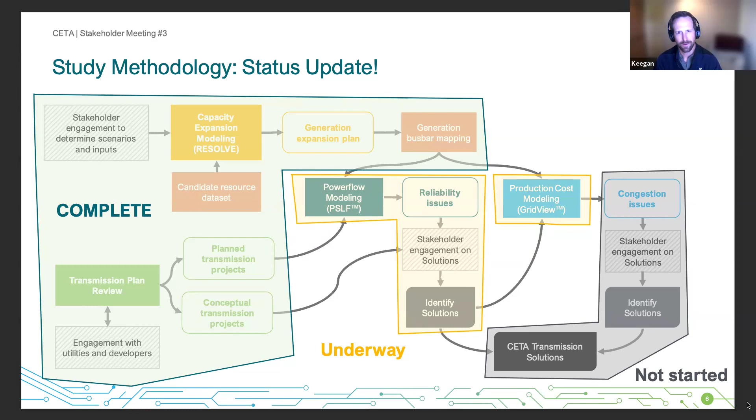I created a version of this. This really shows where we're at with the study. Everything in green on the left-hand side, we're done with — we've completed those tasks and have information building up to the analysis that's ongoing now. The work underway is primarily the reliability analysis and the development of the production cost model. The work yet to be done is the congestion assessment and the synthesis of all this to finalize a set of transmission solutions in a transmission portfolio. So this gives you a good view of progress made to date and work that remains.

Thanks, Keegan. Deb, if you could keep going, please. Thank you. So the timeline and stakeholder engagement.

Leading up to that, as our commitment to stakeholder engagement, we've been providing a 4-meeting series. We're in stakeholder meeting number 3 today, where we'll review the reference case reliability results and talk through some potential solutions. We held 2 meetings prior to introduce the study and talk through scenarios, plus additional stakeholder outreach by email — that was the bus bar mapping proposal and feedback there. So a third opportunity where we heard from you all, and we really appreciate that. There's a fourth stakeholder meeting coming in July — we have yet to set the date. I'll communicate that by email and via the website.

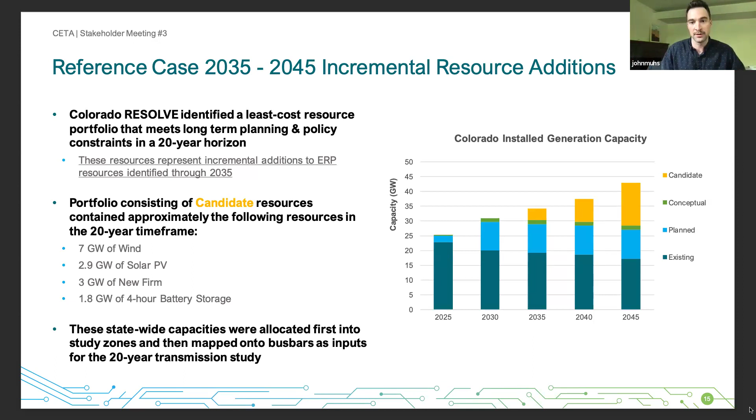As I mentioned, we allocate that resource capacity into one of 9 study zones. And we took a slightly different approach for wind and solar than we did for the new firm and the battery resources. I'll just say from a high level, adding significant amounts of resources onto a grid that has present day limited hosting capacity can be more of an art than a science.

But we tried to make it as informed as possible in terms of the first step we took here, which is really our attempt at what do we know about the grid and its hosting capacity in the near term. Again, that's based on our 10-year representation. So looking forward from the 10-year, is there any areas where we can include wind or solar resources in the system that are going to have minimal impact to transmission upgrades? So that was really our first step.

And then secondly, beyond that, we had to fall back on other considerations: development potential, resource quality, and a qualitative review of commercial interest. As I mentioned, we're not certain of exactly how things are going to come to fruition or how this portfolio would come to fruition. So we are testing some low and high resource levels where we're adjusting these wind and solar resources by plus and minus 30%.

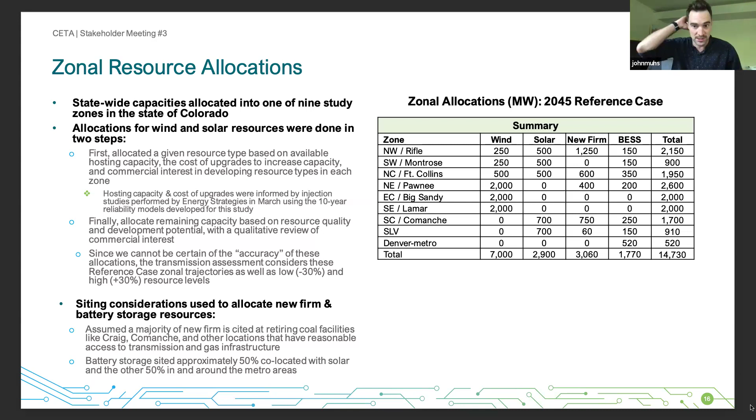The table on the right shows the resource allocations into our 9 zones. And then if you go to the next slide, it's the same material, but shown on a map. This map shows how resources got allocated to different zones in the model.

You'll notice that we made a Denver metro zone that we specifically added battery storage to. This was based on stakeholder feedback, and I think it makes a lot more sense. Previously, we didn't have metro as its own zone, so we had battery storage spread out across zones that were meant to represent the metro area. Next slide, please.

So once we had those zonal allocations, the next step was to map things to bus bars within those zones. Tom will be covering a good portion of this, but the way that went down is we worked with a subcontractor, Emily Leslie at Montara Mountain Energy, and she did an analysis where she helped us rank order bus bars based on a number of different criteria, including commercial interest, voltage, and other criteria.

For each of our 9 zones in the model, we rank ordered the buses based on those criteria, and then had an iterative process where we would allocate up to a certain amount of capacity at each of those buses. That was a preliminary, first-pass, automated process. Then we passed that along to Tom and others, and per stakeholder feedback, Tom made a number of changes based on his experience and stakeholder feedback. So that was all part of the process. We wanted a human in the loop for that decision-making process.

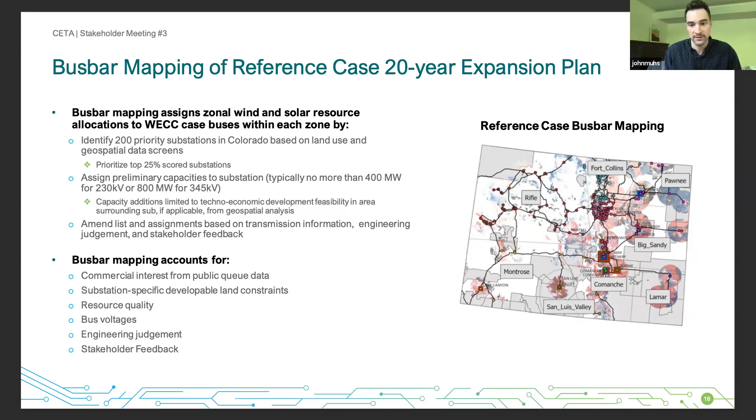With that, I'll move on to the next slide and the study sensitivities, and then we should have time to take a couple questions on this. So we're going back now and starting the process over again, looking at developing capacity expansion portfolios for 2 additional sensitivities. From my understanding, these sensitivities were developed based on stakeholder feedback and other discussions. The 2 I'll be discussing are categorized as the planning scenarios: regional integration, representing Colorado's integration with a broader SPP market, and a high demand future that I'll talk about as well. So let's go ahead and get into the first one.

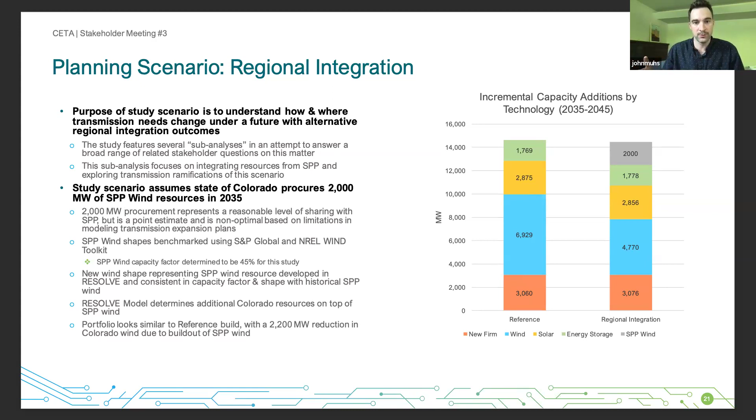So that's the regional integration. Let's move on to the high demand scenario. The purpose of this scenario is to understand how and where transmission needs change under a future with high load growth and electrification.

We did benchmarking of loads with the NREL Electrification Futures scenario. Our reference case was based on the medium moderate electrification future, and this high demand case was based on the high moderate electrification future, representing basically a deep electrification future for load.

Notably, the Resolve model we procured for this study was used in 2021 for a greenhouse gas roadmap study. The high demand modeled in this scenario was similar in scale to the highest load scenario - I forget exactly what it's called, House Bill 1261 or something like that - similar in magnitude to that scenario. There's some documentation that might be helpful if you want to understand what assumptions go into load growth of this nature.

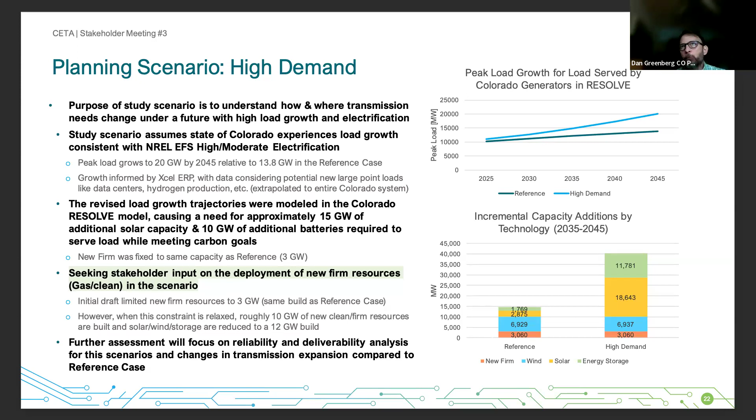In terms of, I guess what I'm asking about, just to clarify, it sounds like you're talking about different components of the load and how that affects their contribution toward peak. My question is more about the ability to have demand responsiveness that can reduce the peak at specific times. Yep, I'm pretty sure that there was some of that represented in the model, I'd have to go back and double check. If so, I don't know exactly how much there was, so I could get back to you on that if you would like.

But I just want to suggest that would be very interesting, I certainly would be interested, and I think probably a lot of parties would be interested in looking at a scenario where you have a pretty significant penetration, or pretty significant ability to shift load. Let's say a lot of the demand that's added is data centers. Data centers can shift their load all over the country very quickly, it's my understanding, depending on what's going on with the grid. So that's a potential there too, in addition to vehicles and, probably to a much lesser degree, heat pump loads.

Thanks, Dan. That sounds like one that we'll maybe take back and get some answers for you. We'll follow up. And I'm going to move on to Ken then, and we'll take Ken as our last question and then move on to the next part of the presentation.

So I noted in your regional integration scenario that you were showing about 2 gigawatts of import from SPP of wind. It occurs to me that if we have the capability of importing and exporting 2 gigawatts, we would probably be exporting like 2 gigawatts of solar into SPP. Have you thought about including that in the model, because it might also help to economize solar in the state as well? Anyway, thank you.

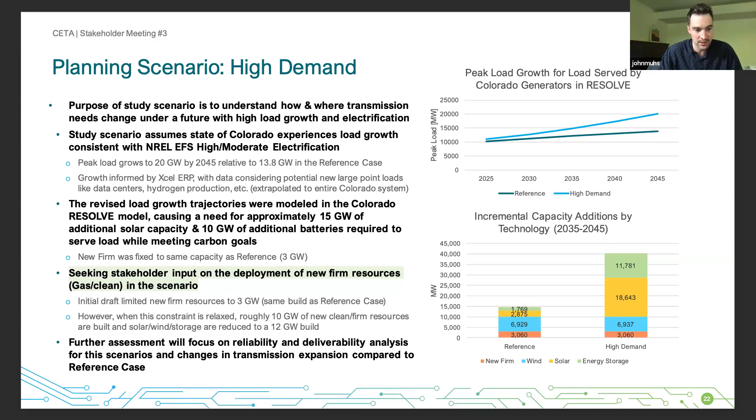Thanks. Yeah, so that's definitely, I will just say that concept is not represented in this capacity expansion modeling. And I would probably defer to Keegan or Tom as to what future subsequent studies will be doing as part of this, or analyses will be doing as part of this, and if they are capable of accounting for that. So I don't know, I'm not the right person to answer that.

So Ken, I think the thing to think about there is, really it's how many games of three-dimensional chess do we want to play at the same time? So your point is probably true, Colorado could become a solar exporter. To what extent does that impact the transmission system is kind of all that I really care about in the context of this study. So I maybe encourage you to think through that a little bit and send us some comments. If there is a discrete impact that you would say is relevant to the study, we can definitely take that into account. But if it gets exported and it's developed close to where it's exported from, the impact on the Colorado transmission system is maybe intuitively null or very little. So just think through that. I think it's interesting from a market perspective, meaning just additional development activity, but again, just trying to recenter us: what's the transmission impact on Colorado?

Thank you. Thanks, Ken. Okay, if we want to move on to the next slide, please, Deb. And we're on to the 20-year reliability assessments.

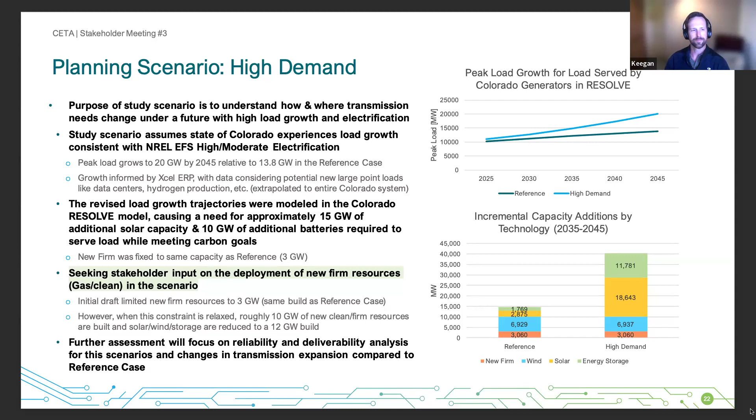So, all right. Thanks, Cathy. And I think we're on to Tom. All right, just want to make sure you can hear me. Sounds good, yep, thank you. All right, well thanks. Good morning.

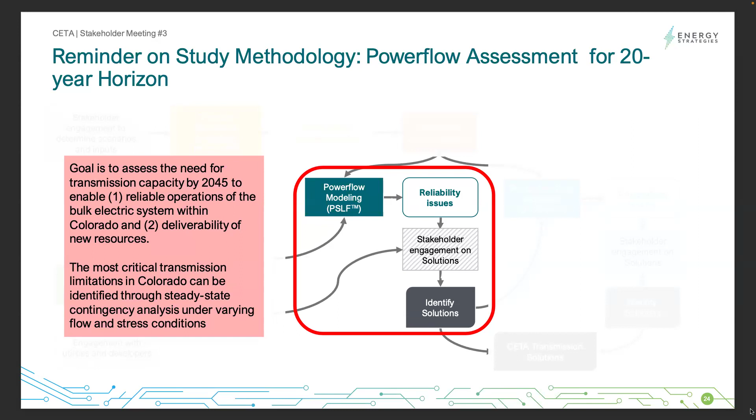Now we're going to get into what I think is the best part of the presentation. This is really exciting. So this slide here really kind of zooms in on the flow process that Keegan showed earlier, really a simplified version of what we're doing with the reliability modeling. And we talked about this in the previous stakeholder meeting about all the things we did for the 10-year, and we're going beyond that to the 20-year. But the process is very similar in that we do our reliability assessment, we try to uncover issues associated with those assessments, make some preliminary recommendations, and then again, we'll be asking for feedback from all of you in regards to what our results are.

So just to set the stage a little bit, our goal here is to understand the transmission capacity needed. And we've indicated this before. Even though later in the presentation you'll see an actual portfolio that we've developed based on the results, the idea behind this is to try to understand the magnitude of transmission development that might be needed, and these are based on the assumptions that we used. So again, I'll talk a little bit more about the assumptions that went into this analysis. John really set the stage for the resource assumptions and where we located those. And of course every study is dependent on the assumptions, but the resource assumptions John really laid out, as to where we located those resources, the magnitude of those resources, that really helped develop the basis for the studies going into this.

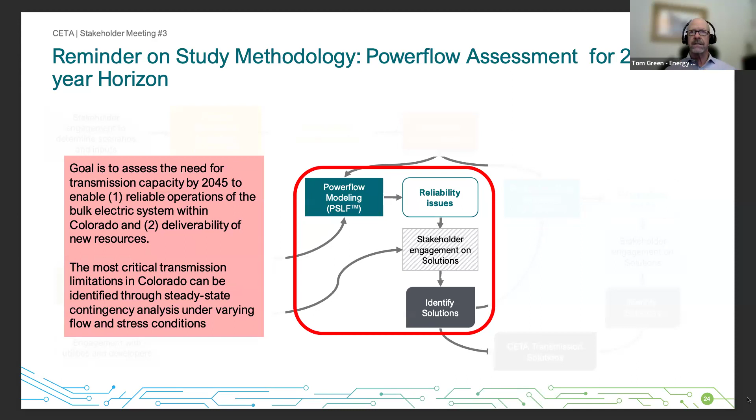So if you move on to the next slide, just to talk a little bit more about the methodology. We did talk about this when we did the methodology for the 10-year assessment.

This is a very similar slide to what we showed for the 10-year assessment. But in this case, we're doing things in a different process. During that discussion about the methodology for the 10-year assessment, we looked at it in terms of reliability versus deliverability.

As a planner, everything we look at is in terms of reliability. But back then, we took a 10-year model and added additional generation, made some assumptions, and did a statewide assessment of that 10-year case. Then we moved on to the deliverability aspect, where we broke down zone by zone within the state, trying to stress the transmission system for each zone to understand where the weaknesses are and where transmission might be needed. We did that with the 10-year.

For the 20-year, we're taking a different approach, starting with the deliverability side. We're doing the zone by zone approach, trying to determine what the transmission issues are, where we see the needs, and developing a transmission portfolio or overlay based on that zonal analysis. Then we'll take all that information, put it into a single model, and do the overall statewide reliability assessment. So a little bit different for the 20-year analysis.

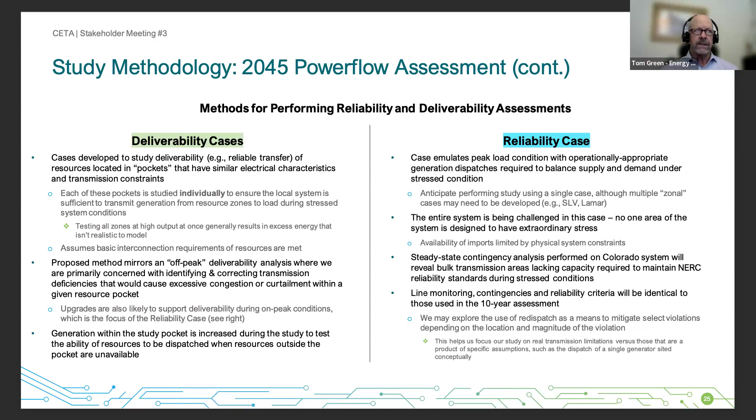If you go on to the next slide, I'll get into more detail about the methodology. For any of our studies, there are some essential components that go into the assumptions we make before we initiate the studies. That has to do with what load we're going to model, what generation we're going to model, and what transmission we're going to put in, at least for the benchmark models before we start the evaluation.

As far as the load goes, John touched on this a little bit, but between the 10-year time frame and a 20-year time frame, the load is going to grow. We have to make some assumptions around what that load growth will be. We got this information from a variety of sources, but starting with the 10-year case, we assumed a compound annual growth rate of around 1.9%.

What that really means is around 2%, you can look at a lot of different load growth factors. We did look at the different utilities' resource plans and what they're thinking about, and that's where we landed. Practically, that means about 20% more load in the 20-year case than what we had in the 10-year case. In terms of megawatts, that's like a 3,000 megawatt increase in Colorado load on its own, so a 3 gigawatt load increase.

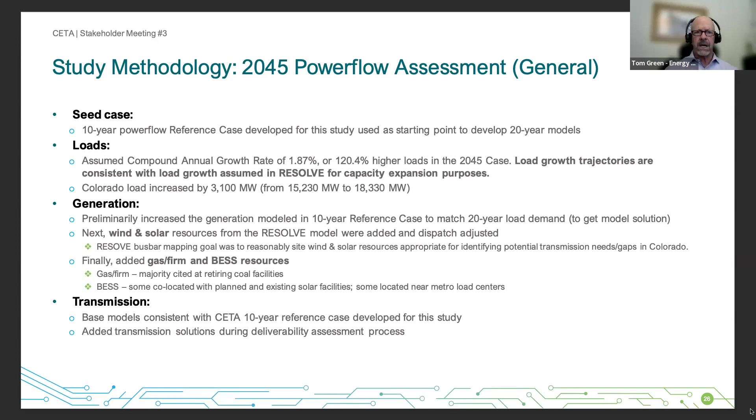The next slide is just some additional methodology in terms of how we performed our assessment. John mentioned the zones. Thinking back to the second stakeholder meeting when we did our 10-year analysis, we broke the state of Colorado into 4 zones. Based on the bus bar mapping, we expanded that even further, and now with this 20-year analysis we have 9 zones where we're looking at stressing the system from each of those zones. As far as our methodology, similar to the 10-year, we evaluated each zone independently.

What we did is we dispatched the resources in each of those zones, both the existing and the new generation, to maximum or near maximum levels, and then scheduled that out of the zone to other zones within the state, or if necessary, outside the state. That's just a common practice planners use to stress the system in each area to identify weaknesses and uncover hot spots that may need to be addressed.

This is very similar to what a lot of utilities do. If you're familiar with large generator interconnection studies, there's a cluster process where entities break their systems down into smaller pockets or clusters and do a similar type of analysis. So it's a common method of doing the analysis.

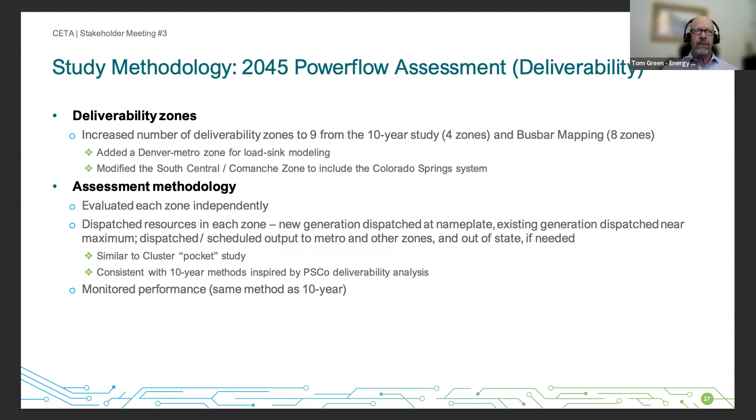If you go on to the next slide, I see another error in here, in that our total is closer to the 15 gigawatt level versus the 13.8 that's shown here. But what's described here are the zones that we used.

John mentioned we established a Denver metro zone in part to put some battery storage there, but it was also to help us on the planning aspect. That Denver metro zone was not meant to try to understand all the transmission limitations inside Denver metro, because as we've stated before, our goal is not to understand all those issues, but to understand what kind of transmission may be necessary to deliver power to that metro zone. So we used that on the planning side more as a sink. As we raise up the generation in each of these zones outside the metro, we'll schedule that to the metro area and also to areas beyond to help us with our study.

We did adjust our southern Colorado zone a little bit to incorporate the whole Front Range corridor leading up to the metro. So that now encompasses not just the Pueblo area, but really the Colorado Springs area as well. In some of the previous pictures you've seen, that Colorado Springs area was included more in some of those eastern zones, and it just made more sense to us to include it in that south central zone as we did our analysis.

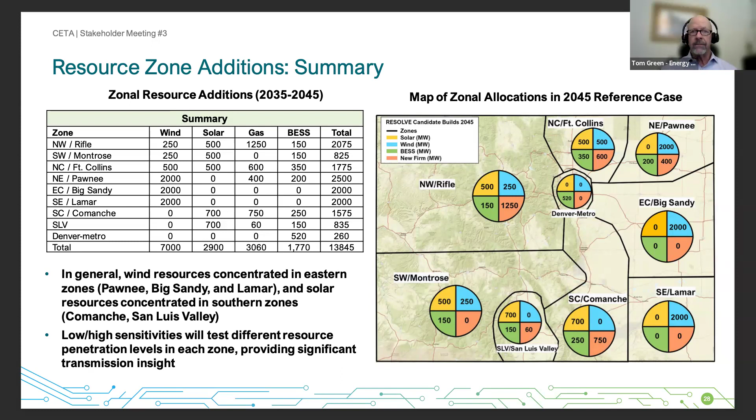If you go down to the next slide - and again, John touched on this - this really gets more granular in terms of where exactly we put the resources. For each of those zones listed on the left side of the table, those are the substations where we located the resources in terms of wind, solar, gas, and battery. A lot of this was familiar from what you saw through the PowerPoint we presented on April 12th regarding the bus bar mapping. We did make some adjustments based on stakeholder feedback from that presentation. We got some good feedback from stakeholders, and in particular PSCo has some experience with generation location in those areas. So a couple of examples - I think originally we had some generation down east of Pueblo around Boone.

That didn't make a lot of sense, so we moved that farther out to the east around May Valley. We had some generation on the Cheyenne Ridge gen-tie around Pronghorn, and we ended up shifting that farther out towards the Goose Creek area on the Colorado Power Pathway. Just a couple of examples of adjustments we made to the generator mapping.

The map on the right is meant to show, with that same color scheme and the size of the bubbles, the level of generation we added for each of those zones. So that's getting grounded in where we placed the resources in our 20-year models.

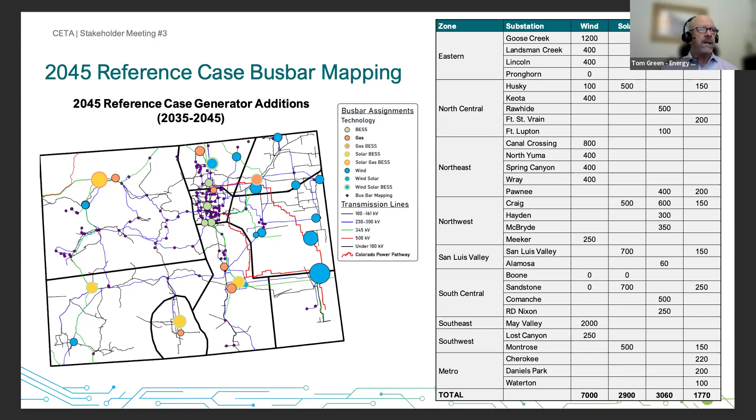I think the next slide we actually get into some of the results. We call these draft - these are the studies we did, the issues we uncovered, and this will lead up to the portfolio I'll show in the next couple of slides. Rather than go through zone by zone, I'll lump these into, I think, 3 slides showing combinations of zones and some of the issues we uncovered.

When I talk about issues in a 20-year situation, when we do an assessment, planners realize the models really have a hard time coming to a good solution when you have these types of levels of generation and loads in the system with a lack of transmission.

So when I talk about issues, I'll try not to use too much jargon, but these are unsolved contingencies. We do contingency analysis where we take elements out of service and look at the performance of the system, primarily element loading - are we seeing transmission lines or transformers loaded beyond their normal capacity, or voltages deviating beyond what would normally be acceptable.

In this case we're really trying to hone in on unsolved contingencies where we've taken outages and the system really just blows up. What I've tried to highlight here are areas of the system where we've seen these blow-ups, where we need to add transmission to get the case to solve and get back into a stable position. This first slide shows the north central, northeast, and eastern parts of the state - 3 of the zones we focused on.

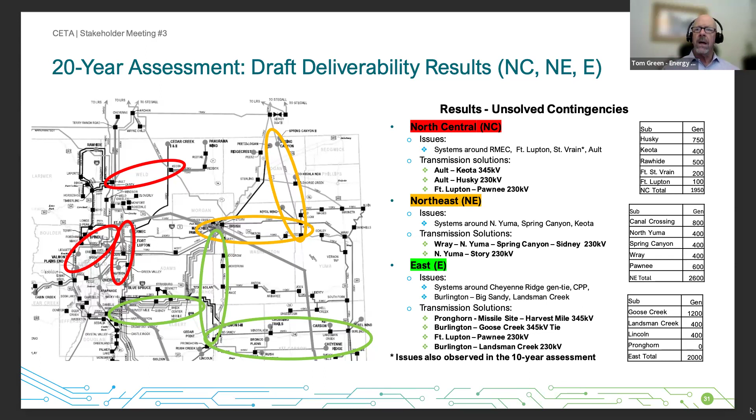If you move on to the next slide, it's a similar analysis, but in this case we lumped in the Southeast, the South Central, and I also included the San Luis Valley. I know this map is kind of hard to read, but this is the southeast quadrant of the state of Colorado. Up in the top center is the Denver metro area, and that first yellow circle is really the Colorado Springs area.

Starting with the southeast, we had some issues around the Lamar area that we started to see as we cranked up the generation. I tried to put some little tables in here to ground you on the type of new resources we added. We added 2,000 megawatts, all at May Valley, which is Lamar, Colorado, for those familiar with that. So as we started this analysis, we saw issues around that area.

The South Central, what we started to see here—again not surprising since we saw this in the 10-year case as well, and I think this is actually somewhat of an existing condition—that system through the Colorado Springs area is a lower voltage system in parallel with a higher voltage system. As power gets transferred up from that Pueblo area, however it gets there from Lamar or Pueblo itself, we start to see issues in that corridor, that Front Range corridor through the Colorado Springs area. So we have a few transmission solutions we added in that area.

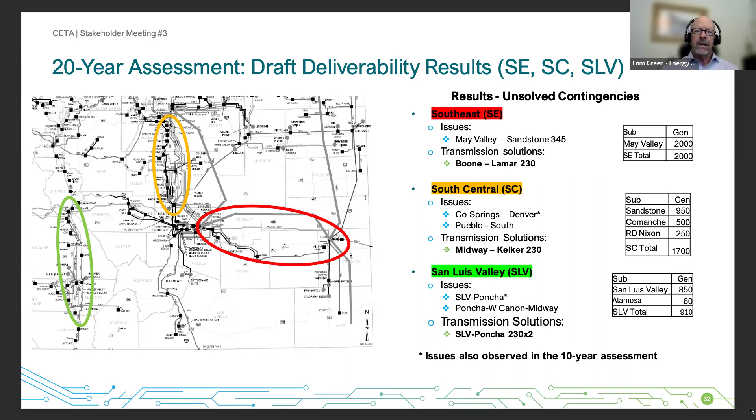Since we weren't seeing a lot of issues with the levels of generation we had based on the resolve models, we took those levels and actually increased the generation beyond what we had in resolve. In the Northwest, we started cranking up around 500, and we started to see issues when we went beyond 500 megawatts in that northwest zone. The southwest zone took around 1,000 to 1,500 megawatts of additional resources before we really started to see issues. That was an exercise to understand, if there aren't issues associated with the resources we modeled using those resolve models, what levels would drive that. That was good information for us to understand what those levels might be.

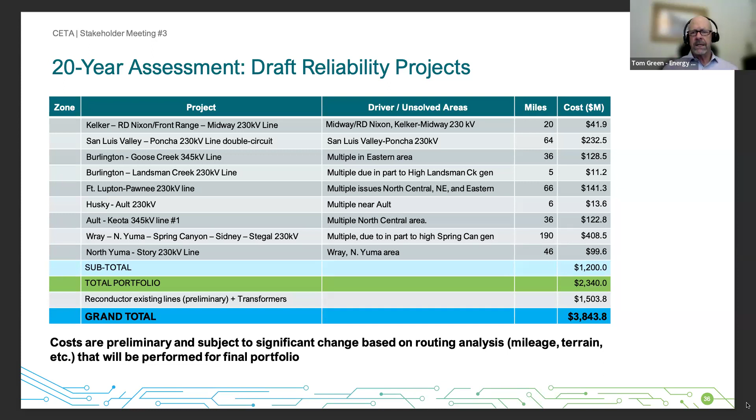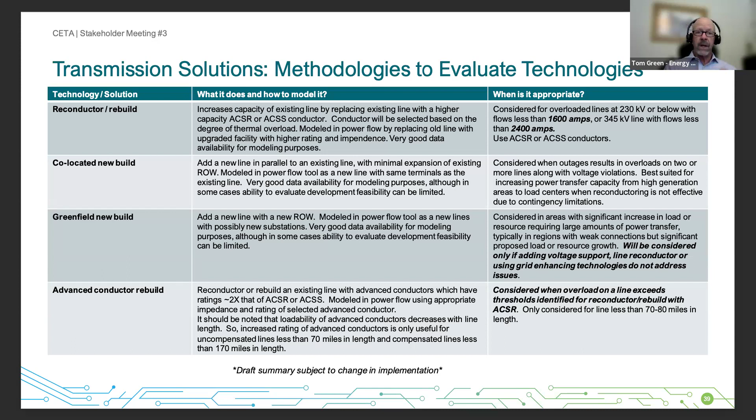The next slide just goes into that in some more detail. I don't know if Keegan wanted to hit any of these, but these are just kind of the list of solutions and methodologies to evaluate.

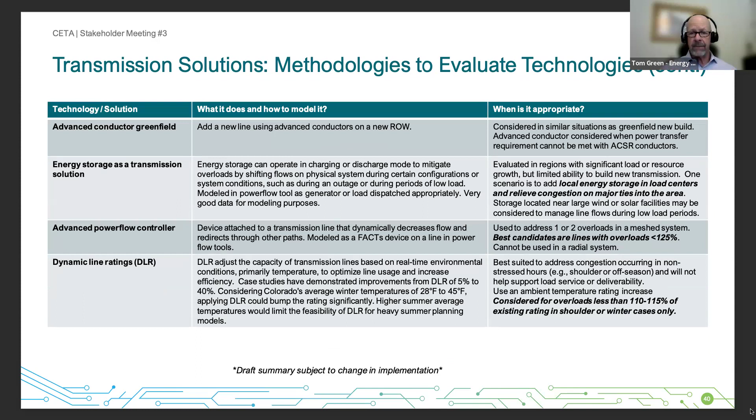I guess lastly, before I take questions, I just wanted to touch on our next steps. If you go on to the next slide.

As I mentioned, for this 20-year analysis, we started with deliverability. Now that we have this portfolio, we've taken that and put it back into what I just call a 20-year base reference type model, where we'll put all of that generation or all the transmission into that model. We can back down all the resources to reasonable levels. For the planners out there, this would be similar to what you would do with a WECC base case, where you have the planned transmission and you adjust the resources accordingly to match the loads, and we can do an overall reliability assessment of that.

That'll be the next step for us. We may uncover some issues during that reliability assessment that we didn't see in the deliverability phase. We don't expect to, because that's generally a less stressed condition, but there can be issues uncovered that might lead us to tweaking some of our recommendations.

Again, one of the main purposes of this was not just to present our findings, but to collect stakeholder feedback. We realize this is a lot of information to provide in a short amount of time, but please take this back, take a look, see if that makes sense, and provide us information on what you might see as alternatives to what we proposed, and how alternative technologies might fit into that. Then we can do an assessment on those viable alternatives and see how that might adjust our final recommendations.

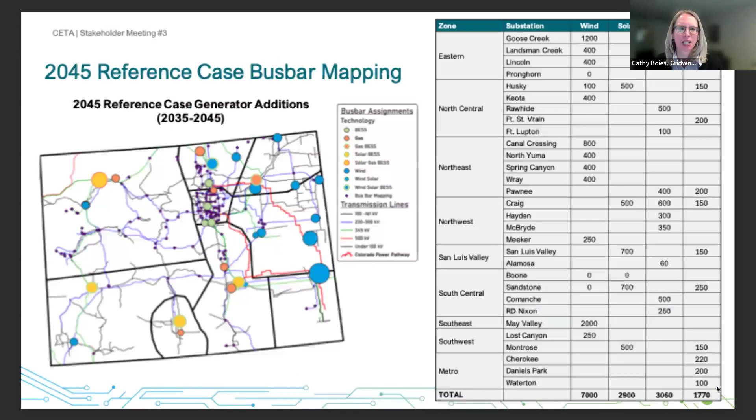Thank you, Tom. Deb, if I could ask you to go back to slide 17, the zonal resource allocations, and why don't we start there. I'm going to start with the chat. Dan, I see some hands coming up, but let's address some of the questions that have already come in.

For the modeling team, we had quite a bit of the generation assumptions in the different zones. Pulling from the chat, the first question is whether wind and solar can share some of the transmission, balancing out some of the intermittency, and transmission into SPP, where the wind is coming in and solar going out from Colorado. Thoughts on wind and solar sharing the transmission system, since they don't usually peak at the same time?

Yeah, sure, wind and solar can share. They don't necessarily color the electrons, so that can be shared. We looked more holistically at what the capability would be, ramping up during those stressed conditions. So there may be situations where you can find efficiencies for that, but yeah, of course they can share.

And then as far as some of the resource types, a question about pumped hydro storage in the Craig Hayden area, rather than the 1250 of gas. Again, it's another type of resource. I've heard of potential for having pumped storage there. Yeah, if you took one flavor of resource away and put another flavor there, we're really just getting an idea of the order of magnitude and the build out might be. But yeah, it's just another type of resource. We didn't specifically model that, but it's an alternative resource that could be implemented in that area.

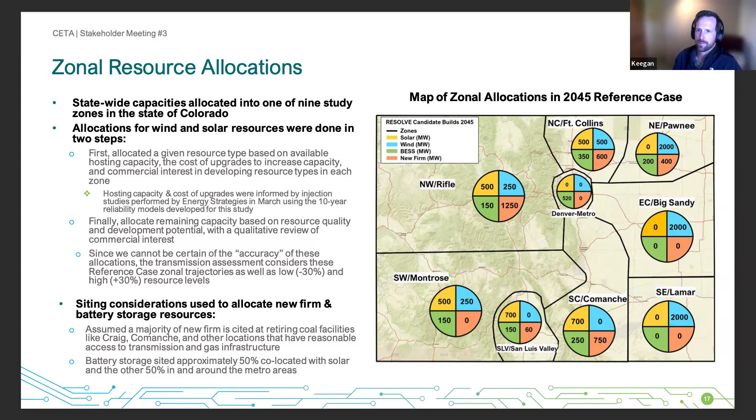Certainly, but we were more focused on just the overall level of resources. Yeah, I'm not sure that I would say that you can trade new firm for pumped. I don't think those are equivalent. So yeah, I think more it's just the location. I'm not sure that the location that we modeled the firm incremental resources could be equivalent for geothermal or pumped hydro. So it sounds like that's a very specific asset. So I don't know that we were trying to model any particular project. That's probably the best answer.

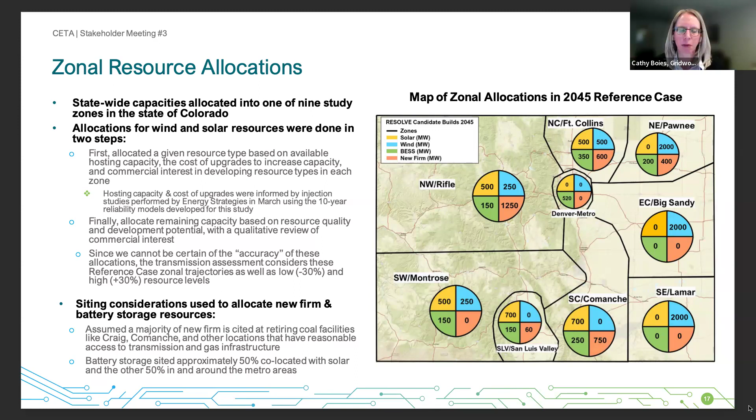Okay, thank you. Then Deb, if we could move on to slide 33. There's a specific question here. So transmission additions deliverability on the western slope, a question about why the May Valley Lamar tie might help for the western slope. Oh, yeah, that's a typo.

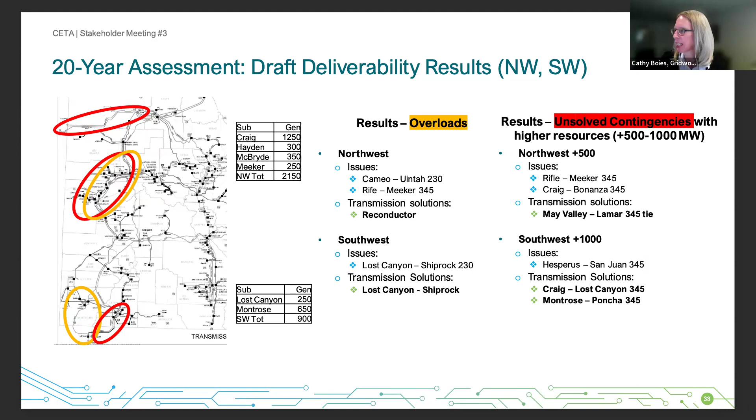Okay, thank you. And then why don't we spend the majority of our time on slide 34? This is where the team would most like feedback. Deb, if I could ask you to advance one on transmission solutions. So I do see hands coming up. Let's talk through some of the portfolio here that the team has put forward. Scott, if you want to start, and then Tyler, I'll come on to you second.

Thanks, Cathy. Just a clarifying question, Tom, excuse me if I missed it. Is the May Valley Longhorn extension that's considered in the CPP already in the base case, or is that an alternative being considered here?

Well, so sorry, the May Valley to Longhorn is in the model, and it's kind of hard on this map because we had to pencil in the CPP, but there should already be a line down to Longhorn. And so that alternative there would be, okay, if you were to shift a significant portion of the generation at May Valley down to Longhorn. Now, it's double circuit 345, so it's pretty beefy the way it's planned. But if it was even more than that, that's why there's a dash line, is there might be a level there where you would need to build additional transmission there.

Or, and I mean, we didn't show every alternative here, but another option for that dashed red line would be that could be another way to get transmission out of the state into New Mexico. So we show a dash line up to May Valley, Lamar area, but that line could also be tilted down to that Longhorn area as well. Okay, so the dash line is above and beyond what's already in the CPP. Yes. Great. Yeah, for the 10-year and the 20-year model, we assumed that Longhorn was there.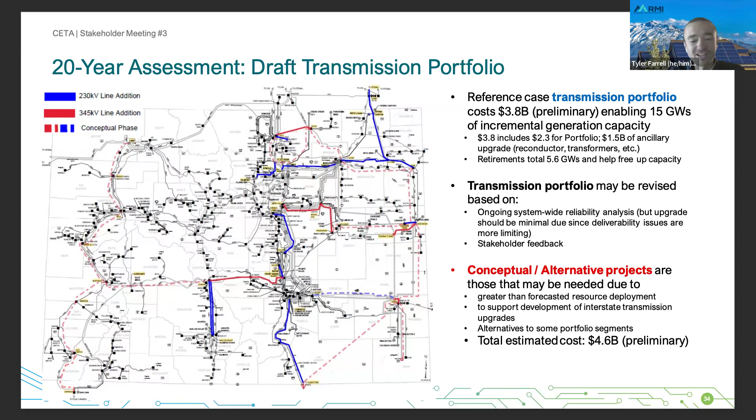I think the way I'm trying to conceptualize this methodology is like, this is the reliability solution to what makes the system run, but you're also going to do a congestion analysis through a PCM, correct? And I was wondering how you're going to evaluate the alternative projects, and if they are going to be evaluated in that congestion step. So I don't know, how are you going to be able to judge whether one or all of these projects, it can be like the value of that project in the economic congestion step of the analysis. I'm not, maybe this isn't making total sense here.

I will address this momentarily when I talk about the purpose of the congestion study. But the main point to understand, Tyler, is we will respond to the congestion results that we observe. That's the main thing, so that would be the trigger to consider some of these alternatives in that assessment. Perfect, that's exactly what I was trying to better understand.

Thanks. Okay, and then we have one more in the chat, and then I'd like to move us along. We will absolutely provide a chance for written comments here, and I hope that as you all consider what you've just looked at and digest it, you can put some thoughts into writing as well. So if we're not able to address everything today, know that we will take a look at it in writing. So last question in the chat here: Denver Metro Zone into the Rifle Zone using an I-70 corridor for a transmission addition. Did the team take a look at that?

We, like I said, on the western side, we didn't see a lot of issues over there. And so we didn't see any drivers for transmission along that I-70 corridor.

We did start to uncover some issues along the northern part of TOT 5 from Craig down to Blue River. But based on what we've seen with San Luis Valley and what's needed there, the potential for an alternative there was really just from Montrose over to Poncha versus trying to build something down I-70.

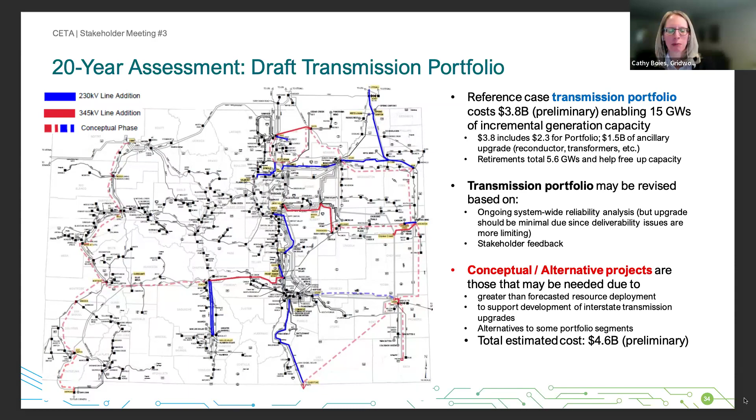Why don't we move on to our next section? This is on the scenarios. I know there's quite a bit of feedback from this of what were the assumptions that the team landed on for the 3 scenarios. So I will hand it back to the modelers.

Yeah, I'll be covering this one, and the short answer is it's a work in progress, which for the most part is fine schedule wise, because we kind of need to finalize that transmission portfolio that Tom was talking about before we can do too much here.

Largely these scenarios are designed to assess how that build out might change. We're not trying to redesign the grid. We're trying to understand, do we need more or less transmission capacity in certain areas in response to these scenarios?

So I'll get to those momentarily, but per Tyler's question, this will give me a chance to talk about the congestion assessment, which admittedly we have not talked about in detail because it's kind of the last step of the study. So that's why, and I'm going to do that now. So go to the next slide, please.

So this is an overview of the study process. So we're kind of down. Do you see this arrow below the reliability issues box? So that's the narrative that Tom just gave you.

And then we're in this kind of stakeholder engagement box where we're kind of iterating and refining that portfolio of transmission solutions. And you'll note this arrow that kind of swings back up into the production cost modeling. That arrow is really important because what the production cost modeling does is it bakes in this transmission portfolio.

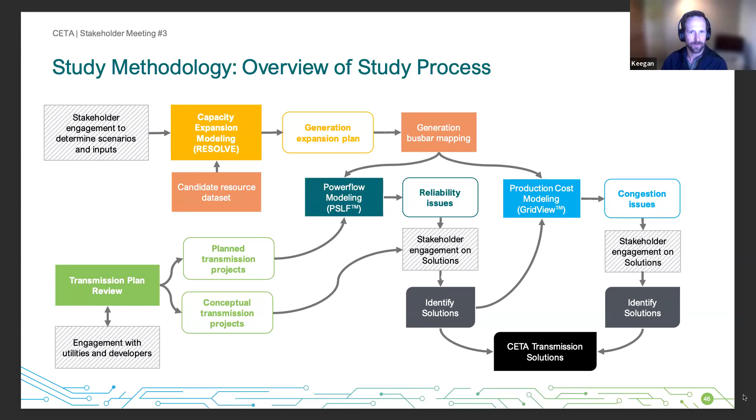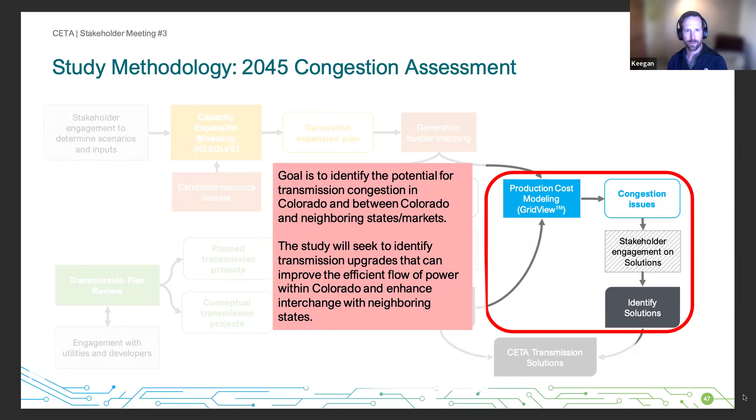And I think this covers what I've been speaking to. The goal is to identify the potential for transmission congestion in Colorado and between Colorado and neighboring markets. We'll identify transmission upgrades that can improve the efficient flow of power within Colorado and enhance interchange. So again, we're not coming to this study with a clear view that we have to fix anything. We'll respond to the levels of congestion that we see. So go to the next slide.

So this kind of lays out everything I just said, it's written down. So a couple things. We'll be looking at congestion costs, congestion hours, the size of the congested elements, that'll kind of tell us where we want to focus first. And then we'll look at, first of all, are there ways to change the portfolio that Tom was just talking about that'll allow us to address the reliability issues and the congestion issues?

So a lot of times all we have to move is the terminus of a project, downstream a substation or two, or just add an extension, another segment that, hey, it didn't show up in the power flow analysis for some reason, but it's showing up in the congestion. Let's just expand this project. That's the first option and most obvious.

The other one is, hey, do we just need an entirely new solution? One of the conceptual or alternative projects that Tom already listed that we're contemplating in the reliability environment, or is it an entirely new upgrade?

So we'll do this work over the next month and a half, as soon as we converge on a starting point transmission portfolio, and we'll share the outcomes of this with you. You can see how tightly the schedule is bound for us to get to really an answer for all this work by the September timeframe. So we are very much ramping up in this area. Go to the next slide.

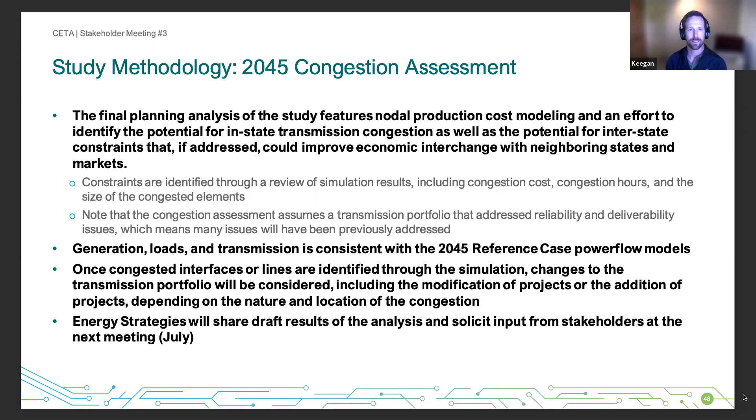And then we're effectively representing the rest of the interconnection consistent with the NREL standard scenario, I think it's the mid case, which is like a 95% carbon reduction across the West by 2050. So it's 85, 90% by 2045. So that's what's going on outside of Colorado.

One area that we are asking for feedback is we originally proposed this reference case, which really has not mattered from a market modeling standpoint. It has not mattered until the production cost model, which is, what reflection of Colorado BAA market participation do we want? We said in stakeholder meeting number 1 a few months ago, we would assume all Colorado BAAs are in the SPP RTO. And that's what we will plan to do unless we hear feedback that's really convincing otherwise.

But I just wanted to note that's what we would start with. And then also we'd like some input on where should we draw the rest of the Western seams, meaning, how big of a market footprint should we assume? I'll be honest that it really doesn't matter too much. It'll matter a little bit in terms of the dispatch we get, but most of the congestion we see in these studies is big enough and severe enough that it occurs regardless of market structure.

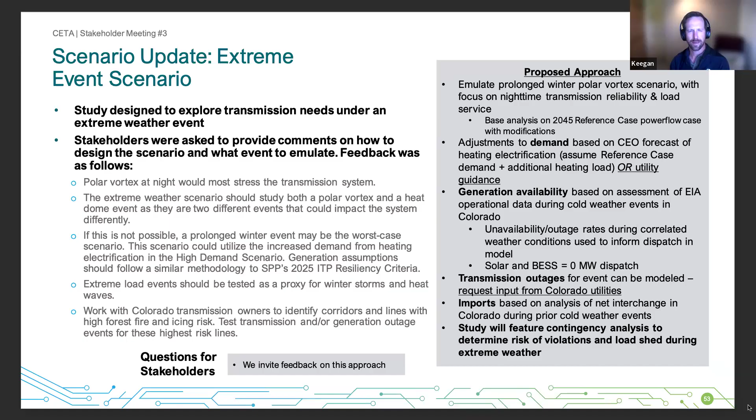Sure, yeah, so we have just a few minutes here, and why don't I start with what's in the chat. Clarification on the MISO cost estimator, just pointing out that may have been used in other planning efforts, but was not included in the PSCO 120-day report. So just feedback for the team to note.

Moving on to Matthew's comment, during extreme weather, duration plays a factor. 4-hour solar paired with batteries versus an 8-hour standalone may show different value, depending on the duration of the storage asset.

All right, I'll open it up to questions, maybe focus this time on the scenario assumptions, if there are some immediate reactions or feedback.

Market framework, interstate connection constraints, the seams assumptions, amount of the firm resources and location.

Yeah, that's great, Cathy, because we're almost out of time. So people definitely submit the written comments, they've been really helpful to date. It has changed what we've been doing, so I hope we've demonstrated that. We've completely changed course in a few areas based off that, so we'll plan to keep trying to do that when it makes sense.